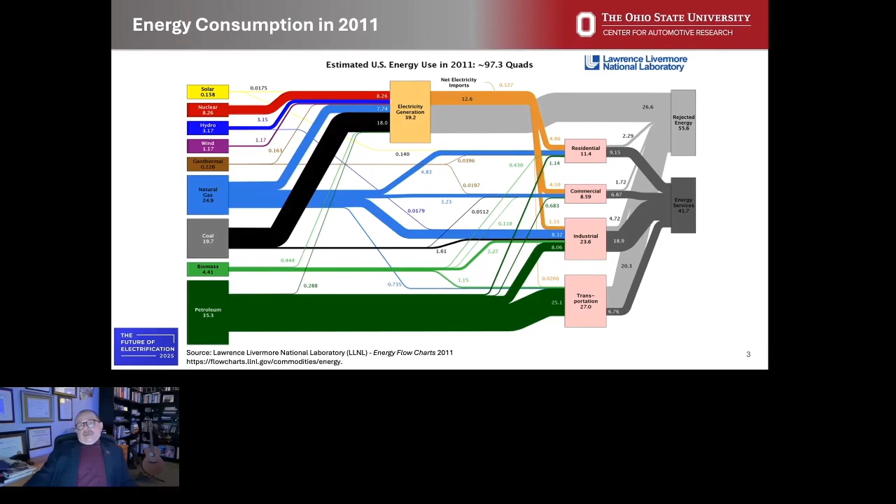Let's take a leap forward. The most recent data that has been published by Lawrence Livermore National Lab illustrates today's situation. So this is a 12-year time span between the two pictures.

What do we see? Well, electricity generation has changed dramatically, at least in the United States. You notice now that what used to be about 50% of electricity production based on coal-fired power plants is now less than 25% coal-based. Natural gas has replaced a substantial amount of that electricity production, and solar and wind power are doing a little, but not as much as perhaps we would like to. But the reduction in carbon emissions in electricity generation has been a clear trend, a clear theme in the development of energy systems over the past dozen years or so.

What is important to emphasize here is that transportation is still very much dependent on petroleum.

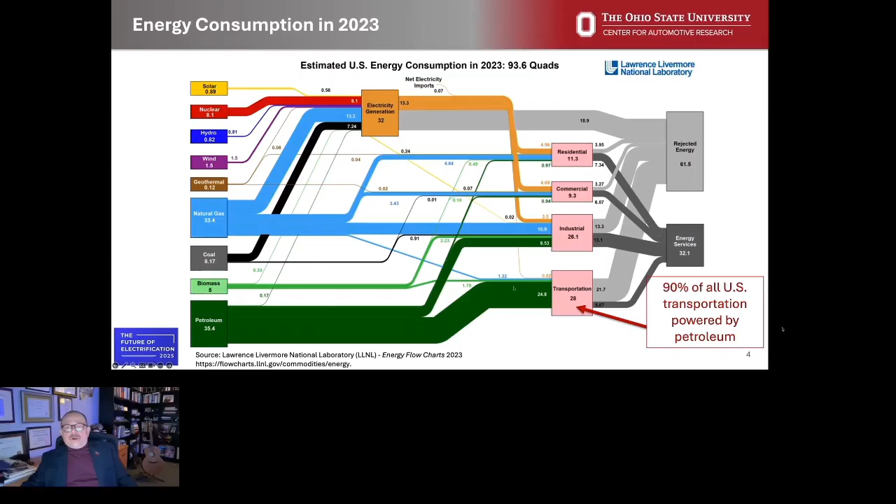Over the past 12 years or so, perhaps the biggest difference is the increase in the use of biofuels, fuels from biomass. What impact does that have on greenhouse gas emissions? Well, one consequence has been that while the electric power sector had historically been the largest producer of carbon dioxide and greenhouse gas emissions, over the past few years transportation has clearly become responsible for the largest fraction of greenhouse gas emissions.

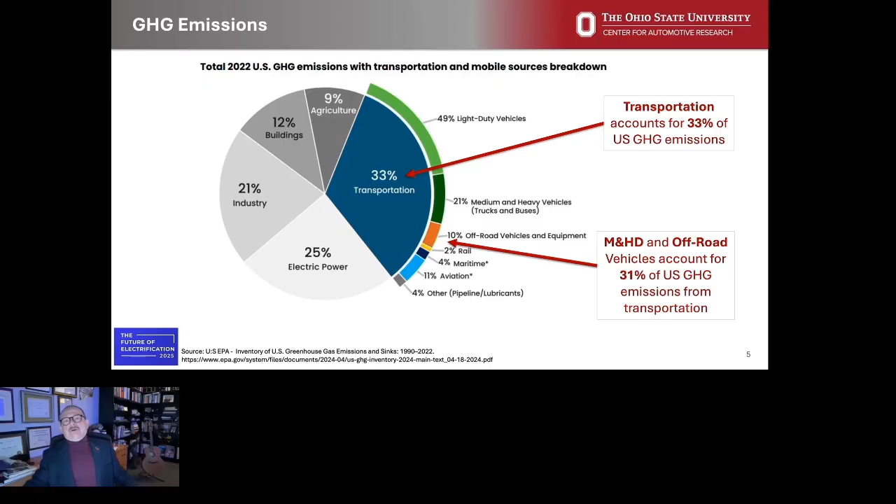Certainly true in the US, but I think this picture is not too dissimilar in the European Union. One of the important points here is that about a third of greenhouse gas emissions are associated with transportation, and once again about a third of that is associated with medium and heavy duty on-road vehicles and off-road vehicles. So altogether, a little more than 10% of greenhouse gas emissions are in that sector.

So we wish to reduce greenhouse gas emissions. What are the pathways that are available to us? Well, there are really, in my mind, three ways of thinking about this problem.

We can address the energy sources. For example, in electricity generation, transitioning from carbon-based fuels to non-carbon-based energy sources, such as wind, solar, geothermal, hydroelectric, et cetera, et cetera.

A second very important component of this is energy efficiency. Can we, by design, the use of different technologies, the use of advanced materials, develop more fuel-efficient vehicles to perform the duties that we wish these vehicles to perform?

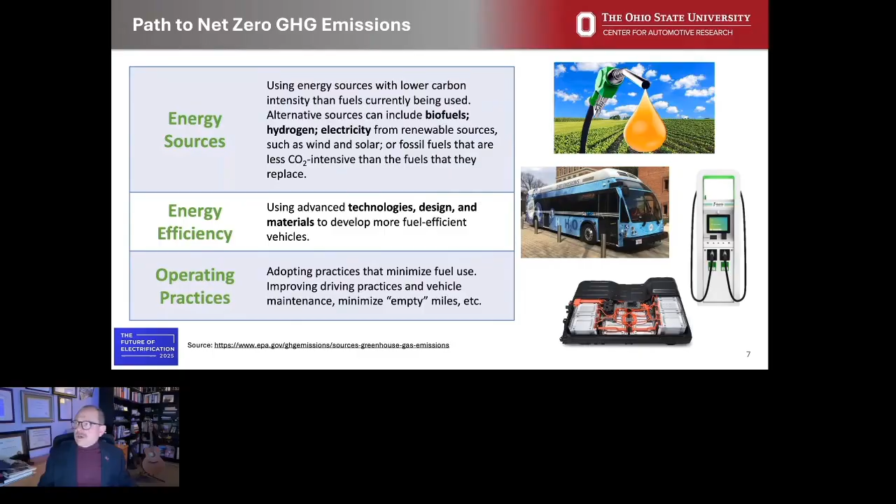And then finally, operating practices. It's not just the energy efficiency of the vehicles and the fuels we use to power them, but as an example, can we be more intelligent about how we ship freight? Could we minimize the so-called empty miles in freight transportation? This is just an example, but if we reduce the number of miles covered by trucks that are not carrying a load, that will be, from an operational perspective, a more efficient use of energy.

So let me say a few words, and I'll give you the big picture, dividing it between on-road and off-road commercial vehicles. I am largely going to use US data and figures as a starting point for my explanations, because that is what I have more immediate access to. But I think many of these conclusions could be easily translated to numbers relevant to the EU, for example.

If you take a look at on-road commercial vehicles in the United States, there are about 23 million commercial vehicles on the road. The way we represent them in the US is by classes. Class 1 and Class 2A are passenger vehicles and light trucks. From class 2B up, we are talking about commercial vehicles. Very important to understand that...

...while long haul tractors, the big tractor trailer vehicles that drive coast to coast every day, only represent about 9% of the total fleet, they represent almost 50% of greenhouse gas and, for example, NOx emissions, criteria emissions. It's important to understand that these vehicles are also predominantly fueled by diesel today.

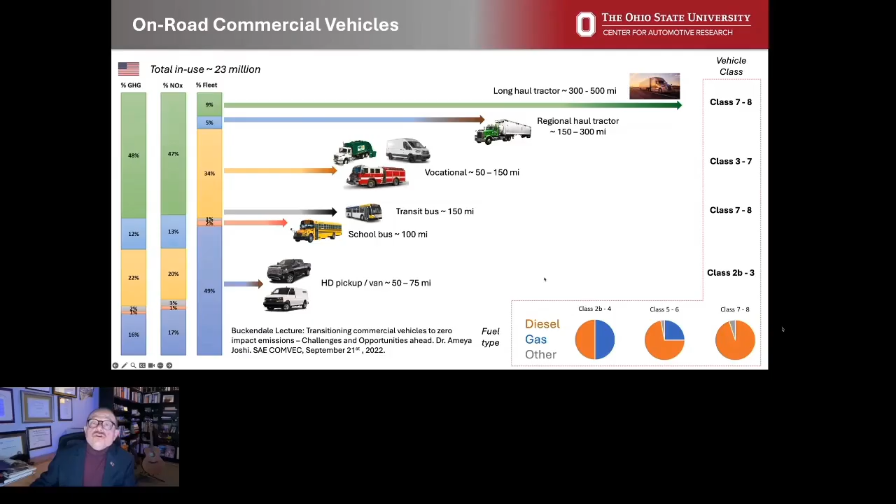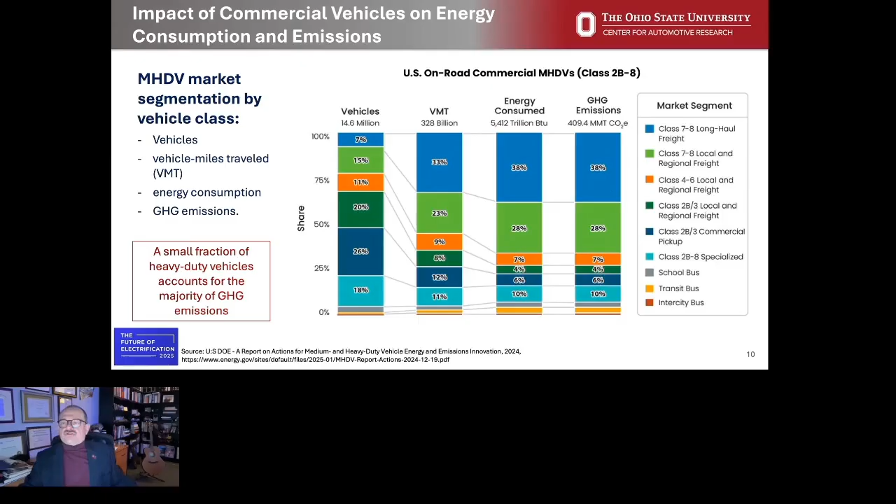If you look at the medium and heavy duty market segmentation by class here, you will see again a similar picture, a little bit more detailed. I won't read through all of these specifics, but I want to point out that when you look at it in terms of vehicle miles traveled and energy consumed, which of course correlates with greenhouse gas emissions, the class 7-8 long haul freight vehicles are really responsible for the majority. But there are a lot of other functions performed by vehicles with different missions, from regional freight movement to local functions to utility functions.

So I won't go into the details of this table, but I will make a few comments. I want to point out that over the years, there has been a clear timeline for emissions regulations for heavy-duty compression ignition, that is diesel engines, across major regions of the world. So you can see here the European Union, California, Japan, China, South Korea, India.

And it is very important to understand that there is a trend, a desire to reduce criteria emissions. So here we're talking about particulate matter, NOx emissions, and this has led to a push for advanced after-treatment systems and alternative powertrain technologies to enable a future for diesel engines. Some of these regulations are especially strict. In the US, the state of California has its own set of regulations in this domain.

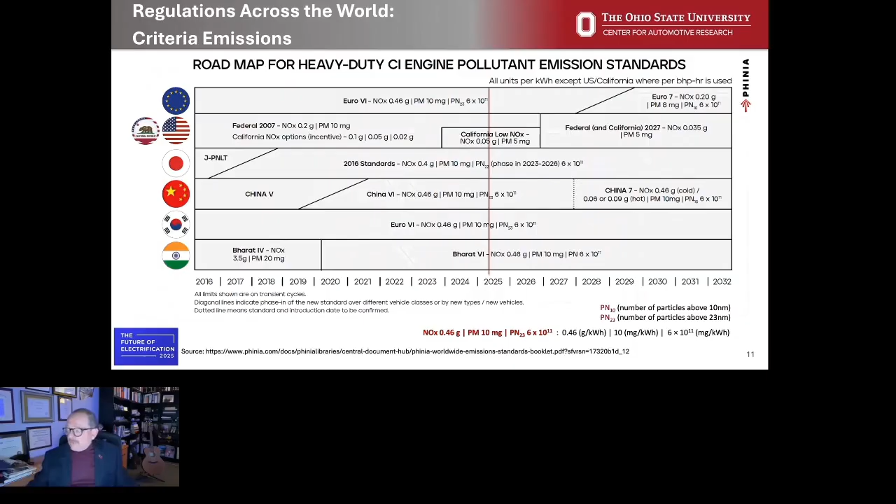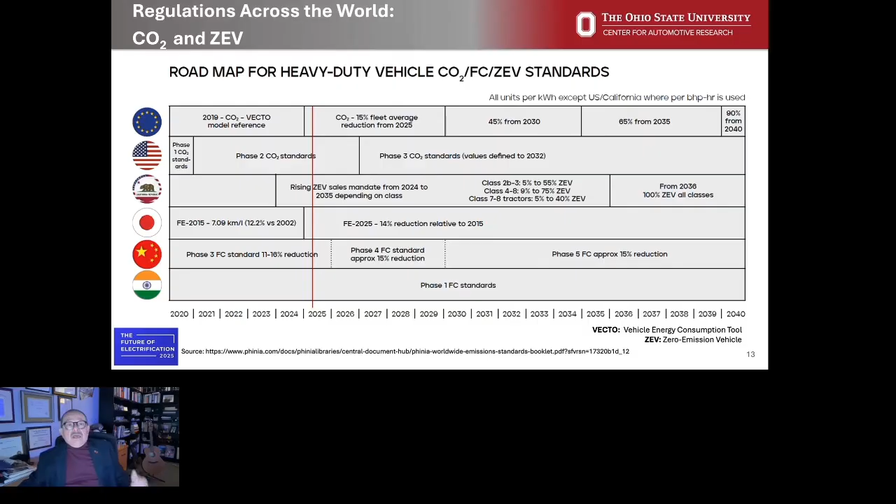That was with respect to criteria emissions. Carbon dioxide is a separate topic. This table shows a roadmap starting from a few years ago, 2020, with projections about different regions of the world. Notice that I've separated California from the rest of the United States. What are the projections for CO2 emissions in heavy-duty vehicles? The goal is to reduce CO2 emissions, providing strong motivation for alternative technologies, including electrification by batteries and hydrogen fuel cells.

The picture for off-road industrial vehicles is perhaps a little more colorful and diverse. The number of functions performed by these vehicles is virtually uncountable. On-road vehicles do one of two things: they either transport people or freight. Off-road industrial vehicles perform a number of critical functions in our economies. They are involved in construction, industrial applications, agriculture, lawn and garden care, recreational activities, logging, and mining.

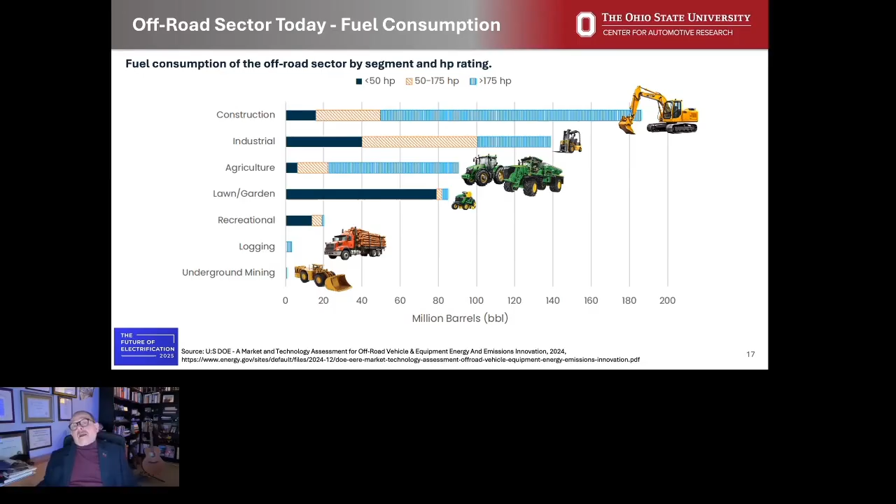Here is a picture that shows, from a fuel consumption perspective, how these different sectors are represented in two ways: by millions of barrels of petroleum used, and by engine size. The darker blue represents small engines, vehicles powered by less than 50 horsepower. For example, in the lawn and garden sector that's the overwhelming majority. Then there are medium range propulsion systems in the 50 to 175 horsepower range, and then the larger engines. Construction represents the largest fraction of fuel consumption in this off-highway sector, with industrial, agriculture, and surprisingly, lawn and garden functions not that far behind.

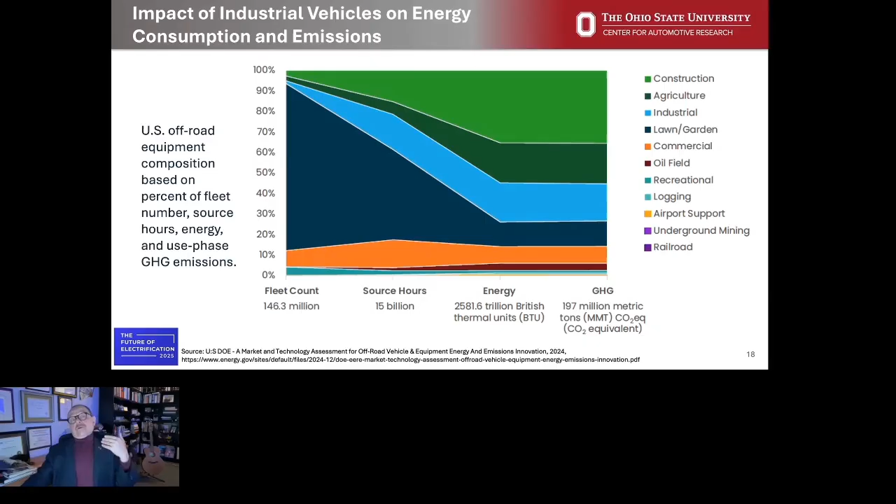Looking at a comparison of fleet count versus number of hours of usage of these vehicles, which correlates with energy and greenhouse gas emissions, you can see that construction, agriculture, industrial applications, and lawn and garden—again, a little surprising—together are probably close to 90% of total energy usage and greenhouse gas emissions. This is an important consideration, and one question we ask ourselves is how can we address this, and what alternatives do we have available for future greenhouse gas emissions reduction?

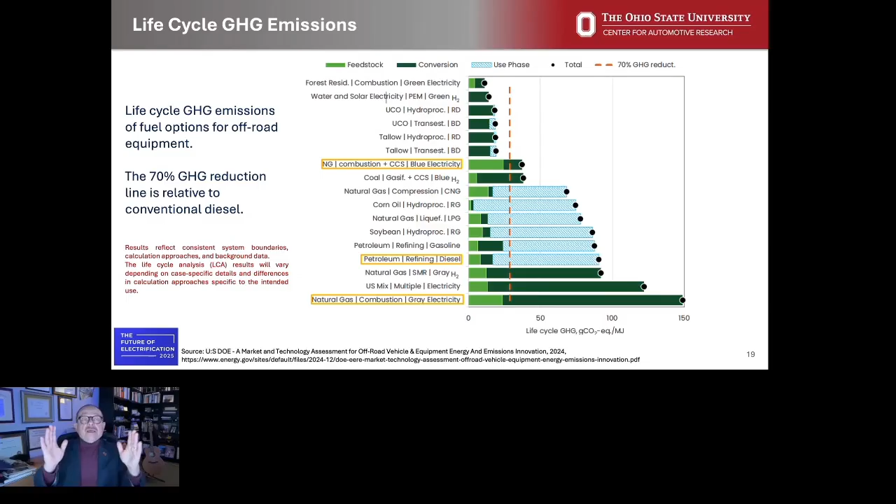It's important to understand that there are three phases in the greenhouse gas emissions of a vehicle: one is obtaining the feedstock itself, the second is converting that feedstock into a usable fuel through refining, and the third is the use phase. If I'm using a diesel-powered vehicle, my emissions are largely generated in the use phase. When using natural gas or other alternative fuels, emissions will be highly concentrated in the feedstock extraction and energy conversion process. It's very important to understand that there are upstream and downstream consequences.

I will make a brief comment about the fact that around the world, regulations for both criteria emissions of off-highway vehicles as well as CO2 or greenhouse gas emissions are evolving very rapidly.

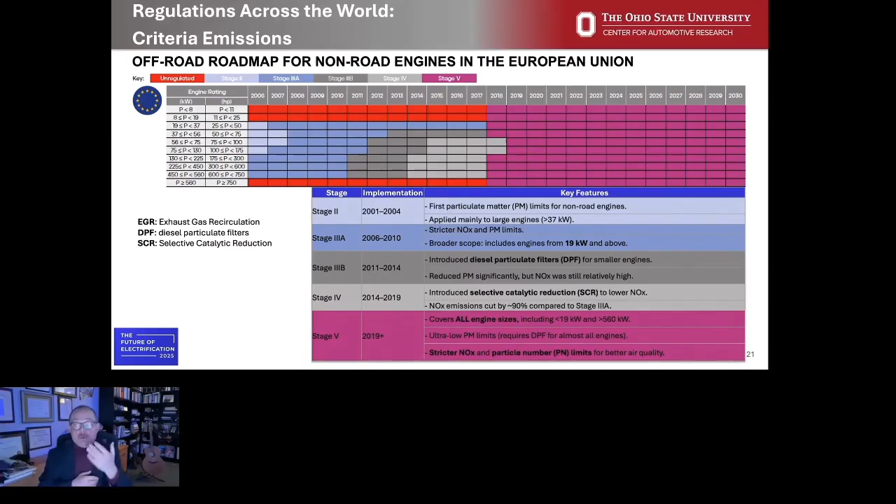I believe that you, the participants in this conference, will have access to the material I'm presenting. It's not the time to delve into details here, but I want to emphasize that as we go to what is referred to as the stage 5 criteria emissions regulations, we're looking at stricter NOx and particle number limits, with a focus on air quality for all vehicles used in the off-highway sector.

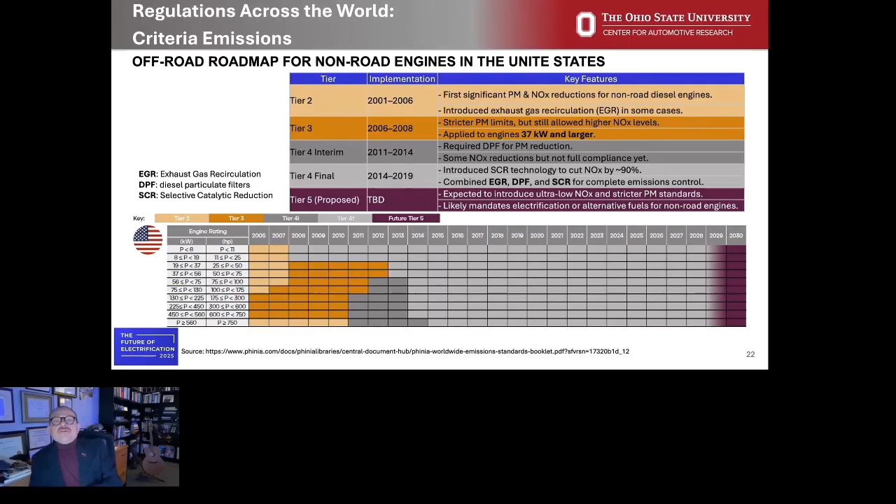And similarly, in the United States, we have what we call Tier 5. There are similarly very detailed and increasingly strict regulations for NOx and particulate matter emissions.

Summary of this first part of our conversation: it is a complex world. We have millions and millions of commercial vehicles operating every day in factories, farm fields, highways, and freeways, and they perform important functions for our economy. We depend on them. The ability to move freight and people is fundamental to economic development. There are significant challenges in finding technological solutions that help us perform these functions while also reducing greenhouse gas emissions and improving air quality.

So what I'm going to do next is talk a little bit about two of the technologies that are typically associated with electrification: batteries and hydrogen.

I will begin with talking about where the landscape of battery research and development, and also battery commercial development, is today. And I will begin by saying that there are really four elements that are important and must be considered.

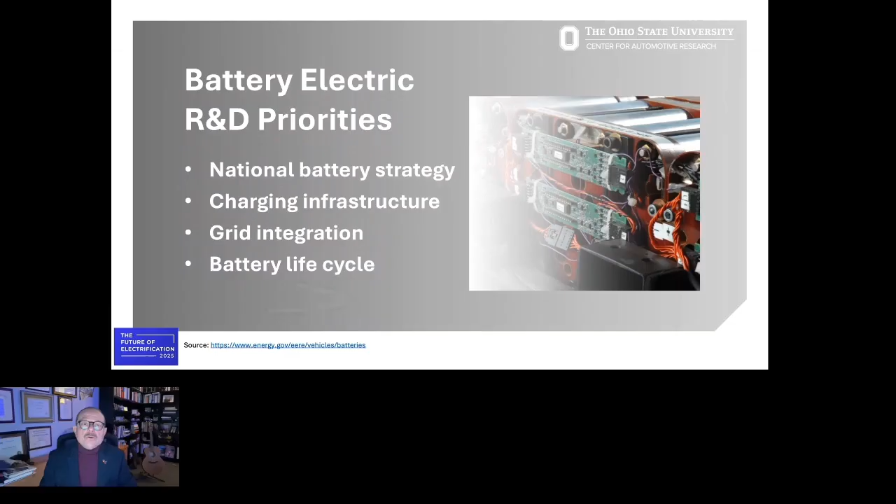One is there needs to be a strategy for how to deploy electrification of vehicles powered by batteries. That requires having a charging infrastructure capable of supplying the energy needed outside the fence and behind the fence. What do I mean by that?

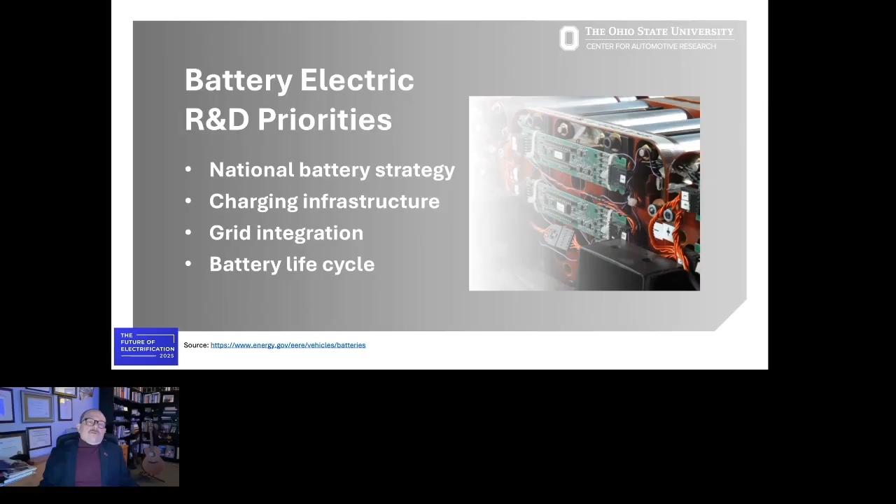Some of it could be public recharging infrastructure in the roadways. Some of it would be dedicated to the specific functions of a port or a factory plant, for example. This will require tight integration between the electric power grid and the charging infrastructure, and an understanding of how vehicles need to take advantage of electric power.

And we'll talk a little bit about the life cycle of batteries as well. A few years ago, in 2021, the U.S. Department of Energy produced a national blueprint for lithium batteries.

This is a document that is available in the public domain. If you do an internet search on those words, you will find it easily. But I want to point out that it's really important to understand there are stages to the development and deployment of battery electric vehicle technologies that are dependent on how lithium batteries are produced.

And that goes from the top level to the raw materials extraction. Which raw materials are used for the manufacture of batteries is extremely important. Lithium, of course, today is an important element. We're still strongly dependent on cobalt and nickel for many battery chemistries, and graphite, of course, is an important element. So where those raw materials are, the supply chain, the availability of materials - all of this is extremely important.

But that's one piece. There is an intermediate midstream step that is extremely important. There is a substantial amount of materials processing that needs to take place - we call it beneficiation. For example, lithium that may be extracted in the form of brine or ore from a lithium mine needs to be refined, much like we refine petroleum into gasoline or diesel fuel. And this processing is an energy intensive process that also has environmental consequences. It requires water. It's not a simple thing to do.

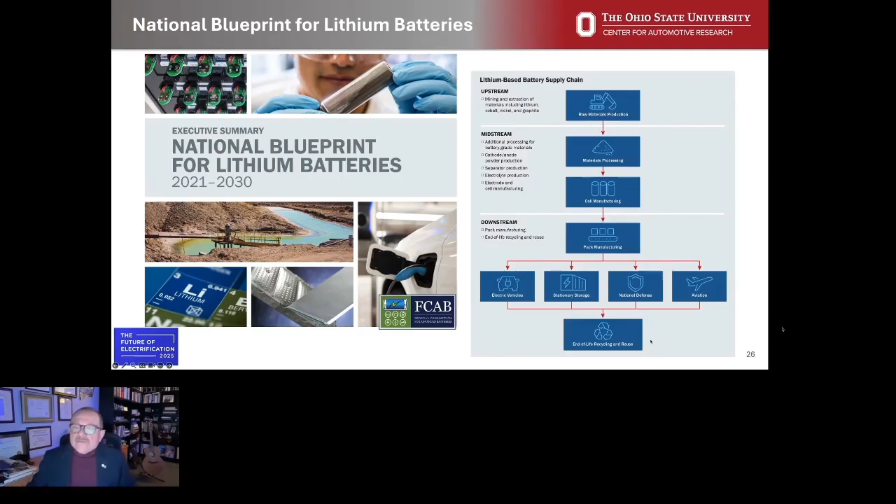Then we go into the downstream segment in which packs are manufactured and used for electric vehicles, stationary energy storage, aviation, defense applications, whatever they may be. And we must not forget the end-of-life recycling and reuse. So this basically represents the complete cycle.

There are challenges to this, as I have mentioned: securing access to both raw and refined materials, looking into alternatives for critical minerals. Today, the two most widely used chemistries in lithium-ion batteries are either based on iron phosphates and graphite, or on lithium, nickel, manganese, cobalt chemistries, also with graphite anodes. So there is a question, here is a US perspective,

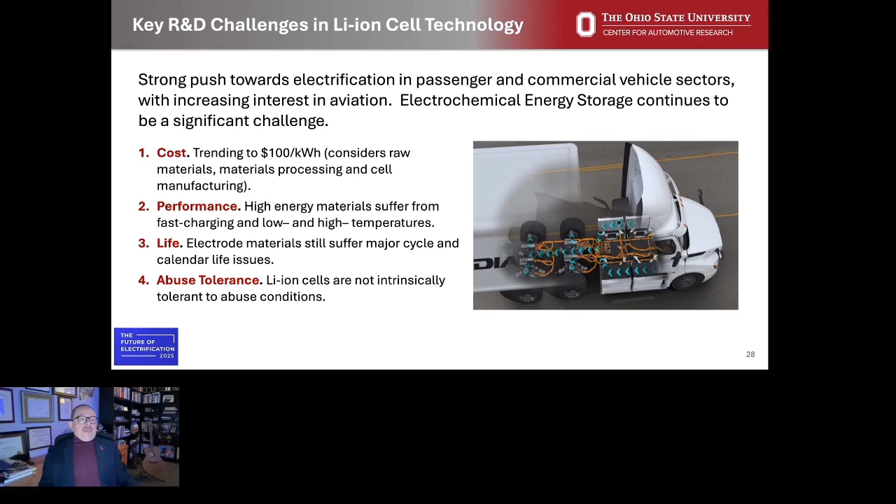There are performance issues. The performance of batteries in terms of their behavior at low and high temperature, or when subject to fast charging, is a very important topic of research. We're not finished exploring how to optimize the behavior of batteries under these conditions. Life—I always like to say batteries are electrochemical systems like the human body, and like the human body, batteries age. And there are abuse tolerance and safety considerations with respect to that.

I'll give a brief example of a project we're working on in collaboration with the US Department of Energy and Oak Ridge National Lab, in which we are exploring what it will take to enable battery electric trucks in drayage applications. Drayage trucks are the trucks that move freight from a ship.

So some of the questions we're addressing are, on one hand, the requirement for charging infrastructure, and on the other hand, how do you optimize the performance and longevity of the batteries used in these applications? You could imagine an application relevant in your industrial sector, define the duty cycles and mission profiles of your application, and study the feasibility of transitioning to battery electric propulsion.

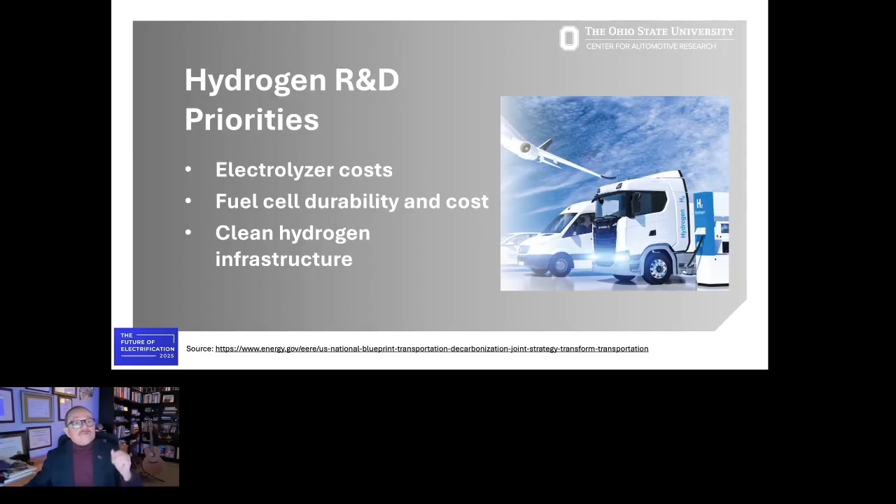The notion then is to use fuel cells, which are electrochemical energy converters that perform direct conversion of hydrogen into electricity. Infrastructure, of course, is an issue, just as is the case with upgrades and improvements to the electric power grid to enable charging. If we're seriously thinking about hydrogen as an energy vector for vehicles of the future, we would need to have the appropriate infrastructure.

A couple of words about hydrogen fuel cells. They are capable of achieving higher efficiencies than internal combustion engines. They are zero emissions at the point of use, and generally speaking, relatively simpler. The stack itself does not really have any moving parts.

But there are challenges. Cost across the board, from the materials to the production of these systems. Their durability is very important. Just as we have to deal with battery aging, we need to deal with the durability of membranes and catalysts. And most important, the biggest challenge is infrastructure to enable hydrogen refueling.

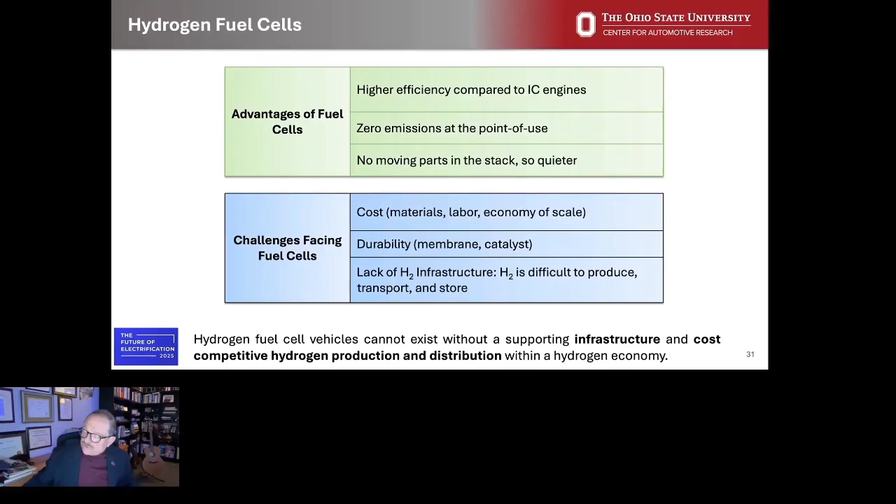I'll make a couple of engineering comments about some of the challenges that are sometimes overlooked with regard to fuel cells. They produce a lot of heat. While it is true that a fuel cell can be 50% efficient, the other 50% is heat generation. And unlike in an internal combustion engine, where amply a third of the heat produced by the engine exits through an exhaust tailpipe system, in a fuel cell we have to deal with cooling systems that have to handle a substantial amount of power.

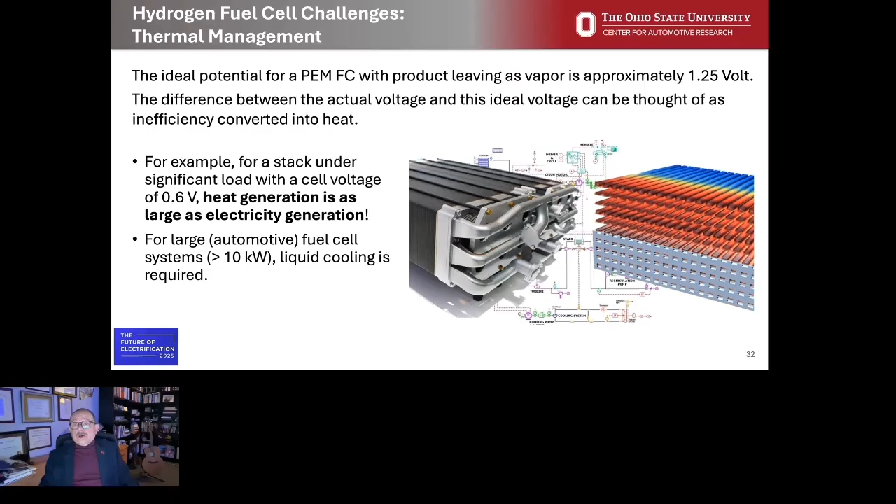Imagine that a 100 kilowatt fuel cell system: if you're producing 100 kilowatts of electric power, you'll produce 100 kilowatts of heat at 50% efficiency. So imagine some of the challenges with the cooling systems.

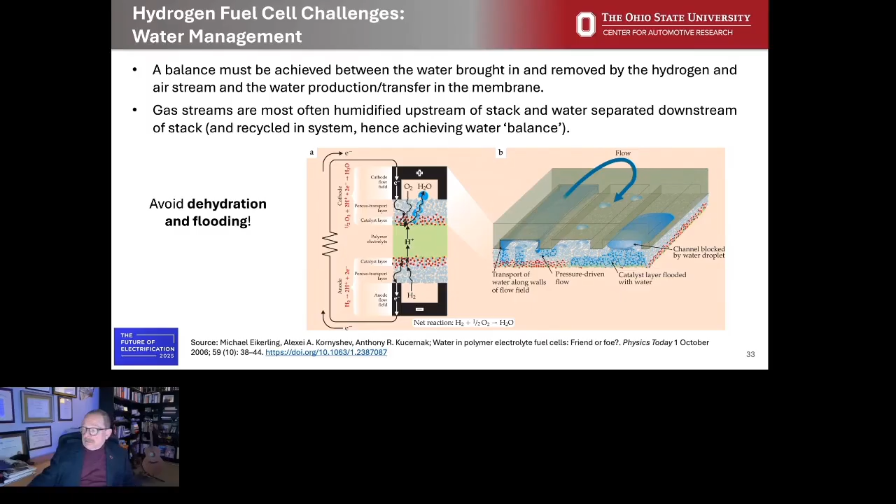It's very important to understand that humidification of the membrane in polymer electrolyte membrane fuel cells is another important challenge that needs to be addressed. The gases used in the energy conversion must be humidified upstream of the stack. We need to achieve a water balance in the system, and ambient temperature, of course, has an impact on that.

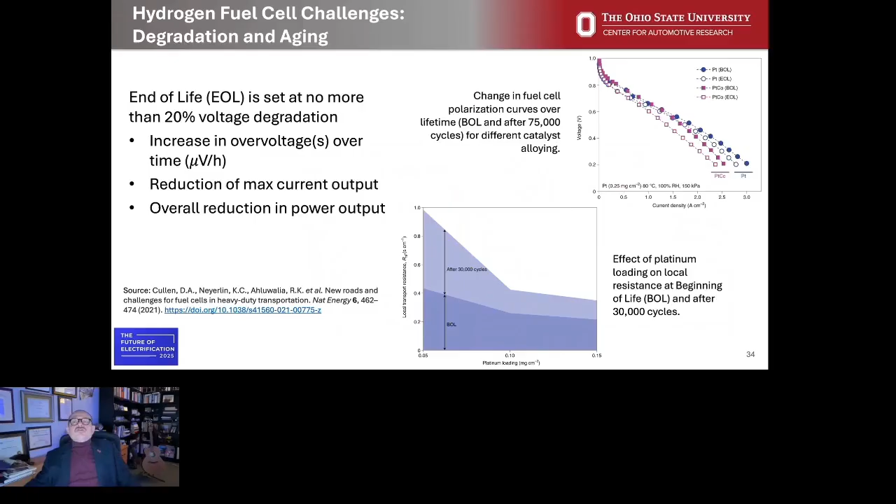And finally, degradation and aging is a substantial challenge in the world of fuel cells. Fuel cells employ catalysts to improve conversion efficiency, but these catalysts can degrade and become less functional over time. So there are issues here with regard to the aging of fuel cells that are analogous in some ways to those related to the aging of batteries.

When I speak to my colleagues in the commercial vehicle sector, there is a general understanding that if we can get hydrogen to cost $1 to $2 a kilogram, and have an infrastructure capable of delivering it, it would become an attractive alternative to diesel fuel, for example.

So how do we produce hydrogen? This is a very important point that ties in to some of the things I said earlier. One way of producing hydrogen is by electrolysis of water. Well, that of course requires electricity.

The US Department of Energy has a target, but a target is a wish. It is not necessarily an executable plan to arrive at $1 per kilogram hydrogen from water electrolysis, which would require a significant reduction in the cost of electricity, in the capital cost, and in operations and maintenance. So the point is that hydrogen production by electrolysis is something that is desirable, but will require significant cost reduction before it becomes attractive.

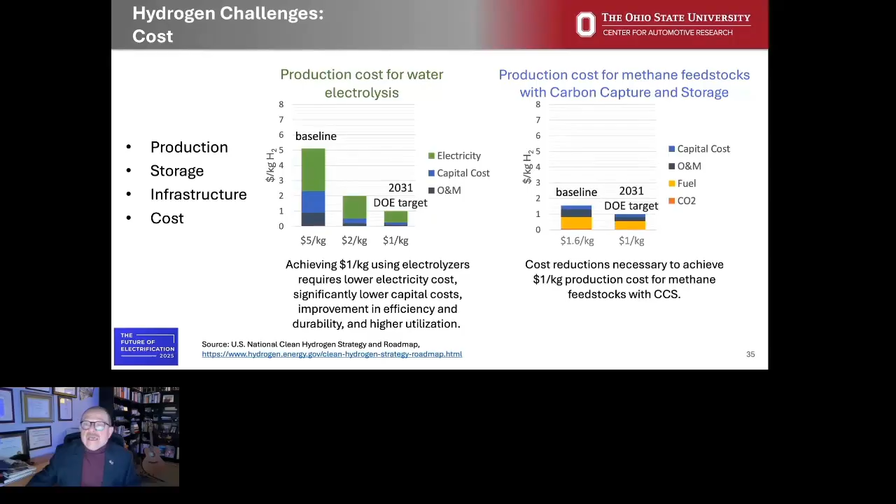But understand that this would make sense in a context in which the steam reforming of methane or natural gas is accompanied by carbon capture and storage. Otherwise, the upstream emissions would be too large.

Electrification can take place in multiple forms. Here are some examples of vehicles actually on the road in the United States: a class 3 battery electric small truck, a class 6 larger battery electric vehicle used as a refuse hauling truck, the UPS trucks we see everywhere here in the US, which are actually EVs, and a utility truck.

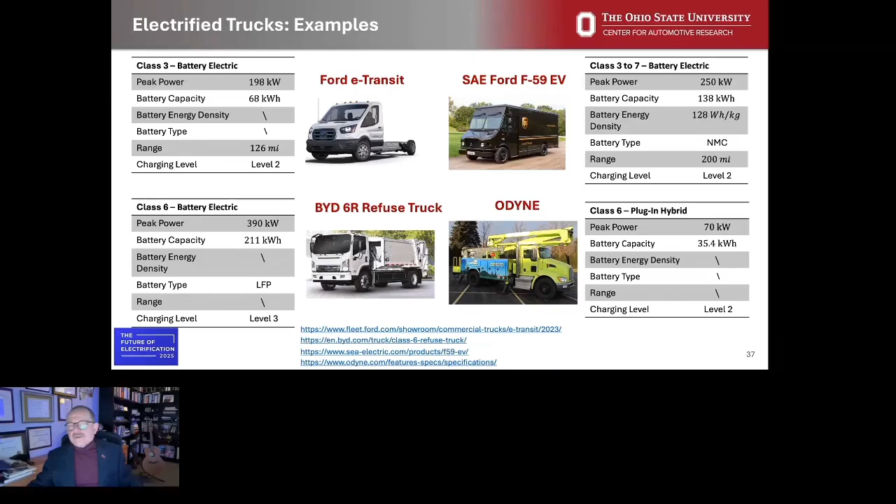I'll give a brief example using this utility truck to make a couple of important points. Odyne is a company making plug-in hybrid electric medium-duty utility trucks, though this data is a few years old and I'm not sure how many they have now. The key point is the issue of mission profile, which in every commercial application, on or off highway, is critical to understanding what architecture is most appropriate for that specific use case.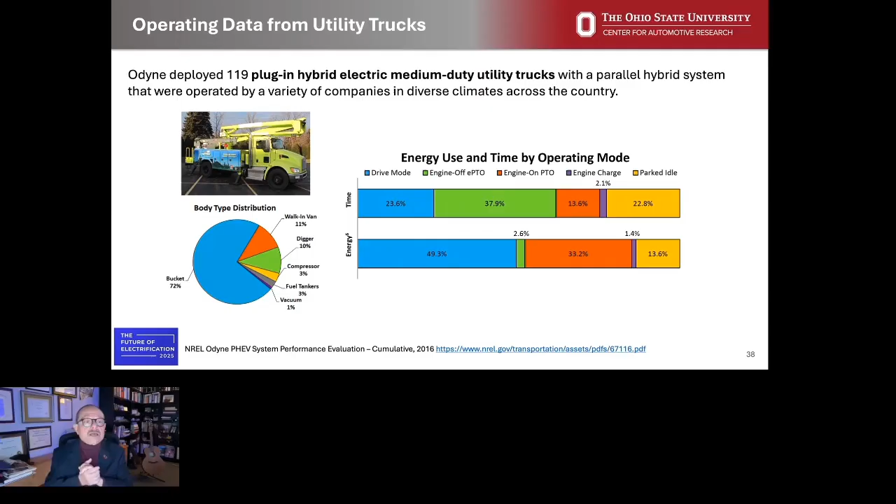What about energy consumption? About 50% of the energy consumption is associated with drive mode and about a third with engine-on PTO. This is just an example of a utility truck, but whatever application may be relevant to you, understanding the duty cycle is of critical importance.

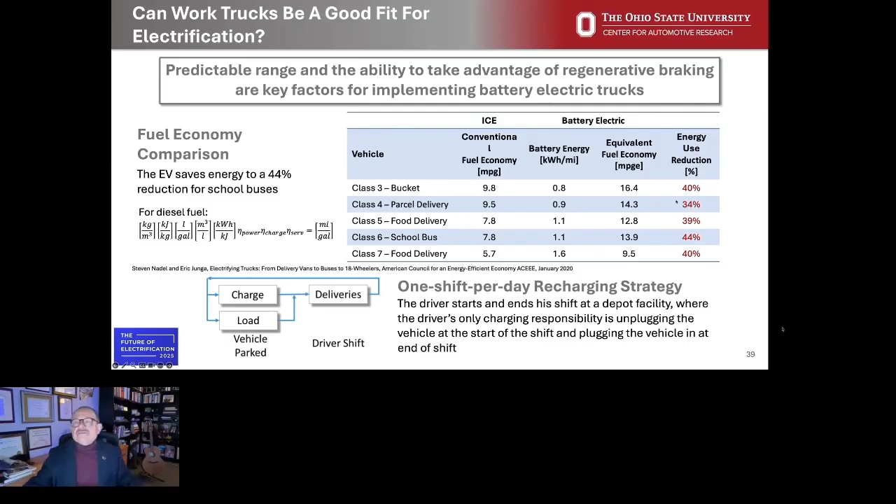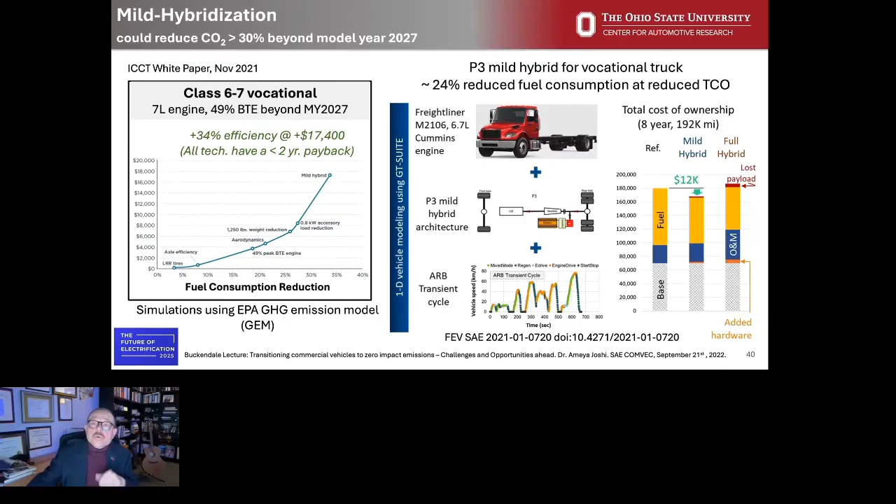In a study done relatively recently for other applications—bucket trucks like the one I showed you, parcel delivery, food delivery, school buses—there's a question of what the potential for energy use reduction is, which can be significant for these specialized applications. But there's also the question of what benefits can be achieved, and in a variety of ways. For this vocational truck, a mild hybrid powertrain may be enough to achieve significant fuel consumption savings, over 20% for this application, without investing too much in the battery pack.

This brings up the subject of total cost of ownership. For a personal vehicle, customer preferences like looks, color, and convenience features are sometimes the most important things. But for vehicles used in the commercial sector, on or off highway, total cost of ownership is and should be an essential criterion in making decisions about the architecture of the propulsion system and the selection of energy sources and fuels.

It's important to understand that total cost of ownership includes the cost of the vehicle, the cost of financing when a fleet is purchased, the cost of fuel as just one element, insurance, maintenance and repair, taxation structure in the specific country where the vehicle is used, changes in payload—will a battery electric vehicle reduce payload because of increased mass from the battery—and in general, labor and time, such as time spent charging the vehicle. It's very important to understand total cost of ownership.

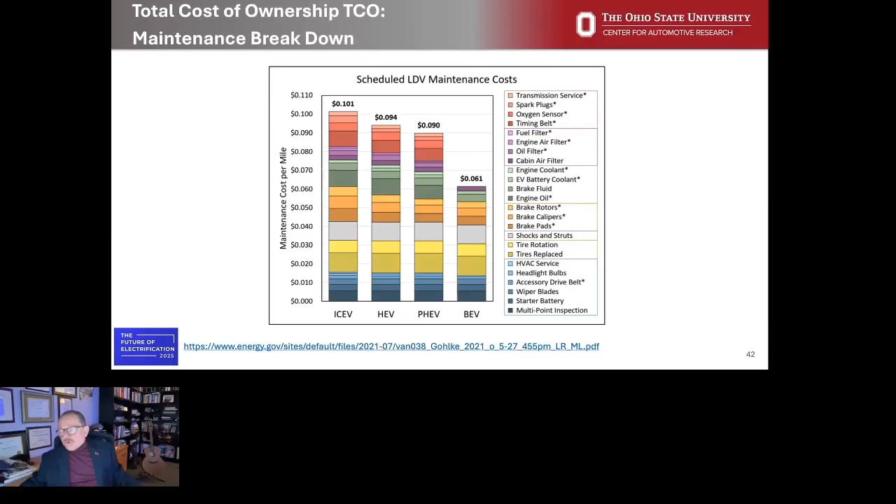Here's a simple example: looking at maintenance breakdown, there's a clear advantage to battery electric vehicles with much lower maintenance costs. But there are other elements to consider besides maintenance. There are also risk factors and uncertainties with alternative powertrains—for example, if the vehicle uses a battery, what if it has to be replaced? That's potentially very expensive. What's the initial price differential? Will there be incentives or tax rebates? What about the price of fuel? Here in the United States, diesel price fluctuations are substantial.

And from one month to the next, your benefit in having an electric solution may be nullified by a decrease in diesel fuel prices. Similarly, electricity prices, annual mileage - do we know exactly what kind of duty cycles the vehicle performance, how much it will be used, and so on.

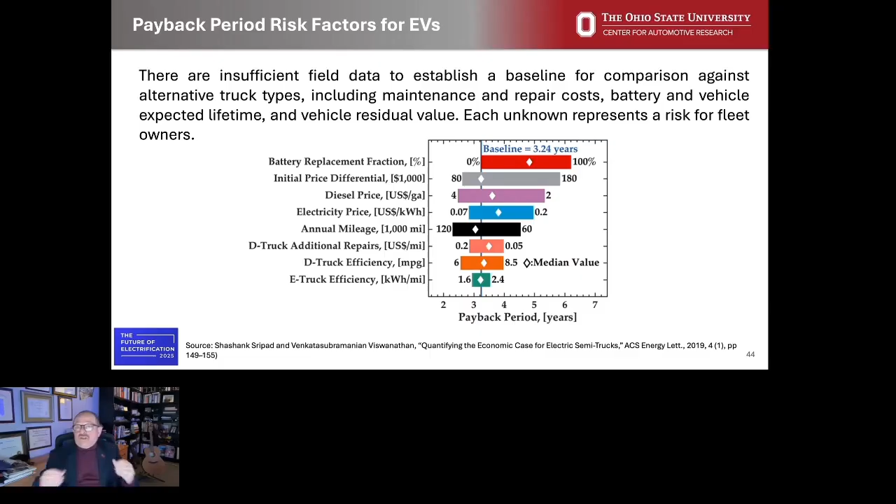These are all observations that have an impact on payback period. So if I need to make a larger investment in purchasing an advanced or alternative powertrain vehicle, what's my payback, and what is the uncertainty in reaching this payback point? So these are all important considerations.

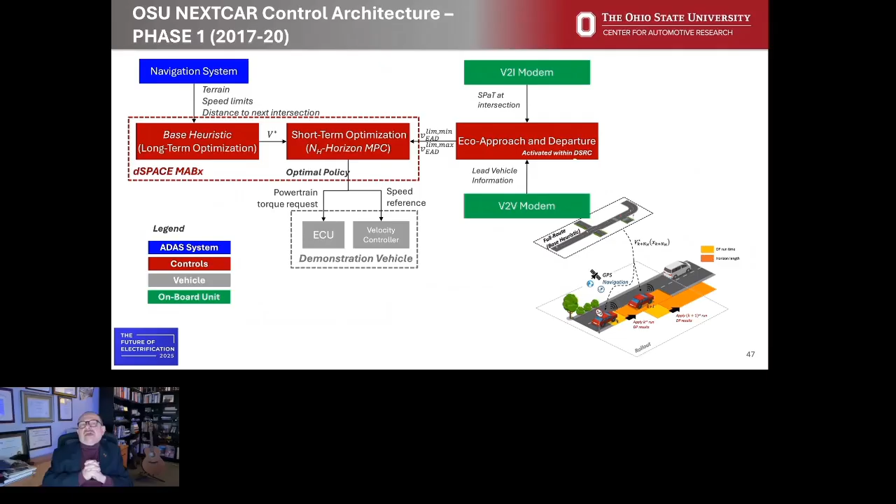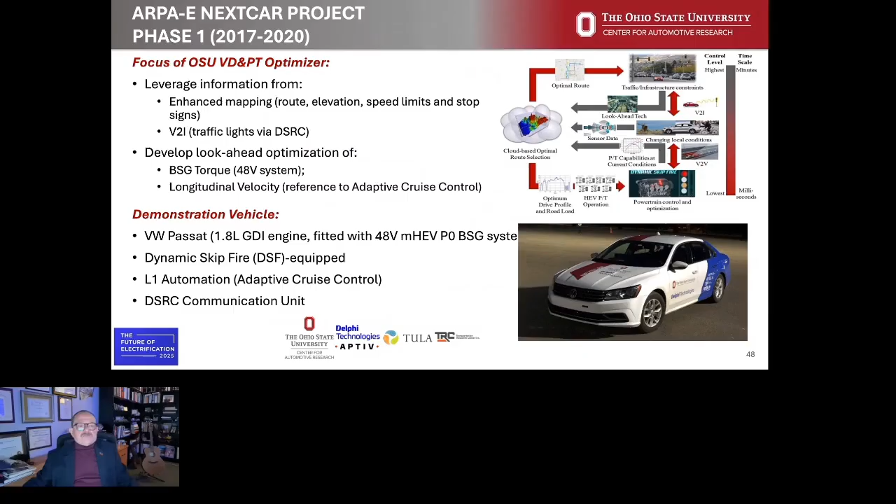And I will close with a very brief comment about the fact that there are some fascinating opportunities available to us. I have had the pleasure of working for a number of years now on a program called NEXTCAR. It's focused on passenger vehicles, but the focus is how is it possible to utilize knowledge of the duty cycle of the vehicle and of its surrounding environment to achieve energy efficiency improvements. And this, I think, is something that we clearly demonstrated has potential benefits in passenger vehicles, utilizing sensing and infrastructure provided information and the methods of artificial intelligence, machine learning, and advanced control ideas.

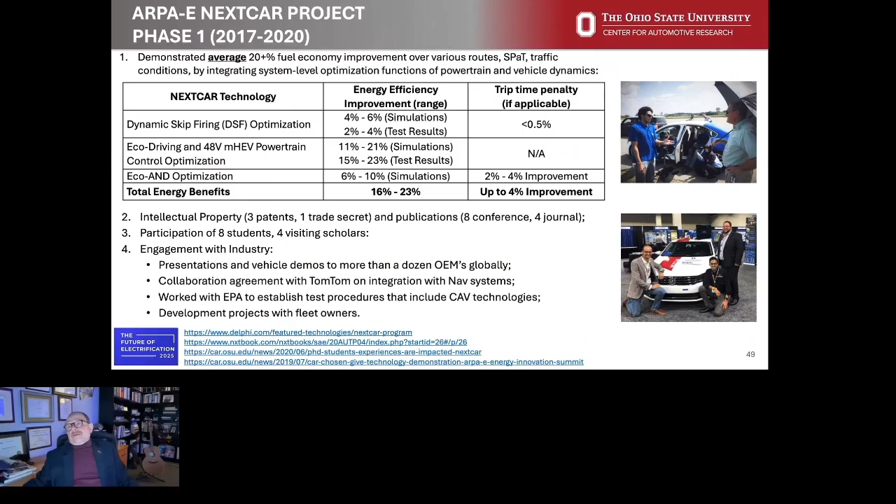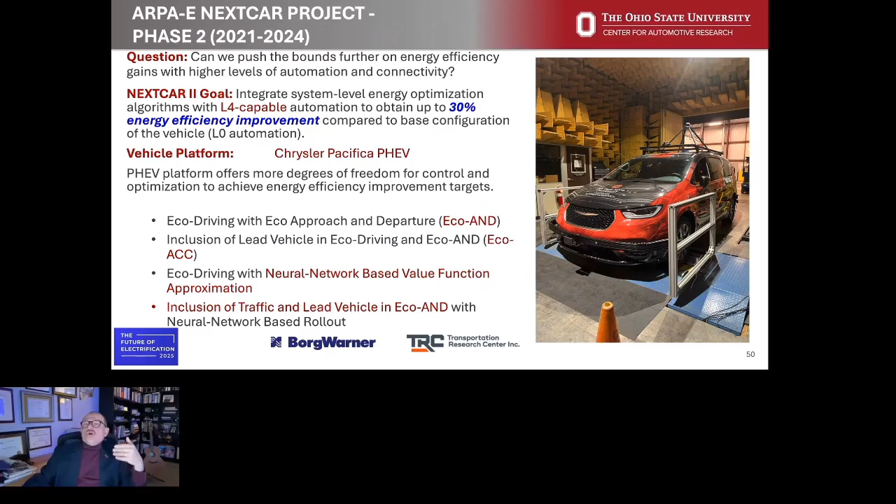We demonstrated that it is possible to achieve operational improvements of the order of 20% in passenger vehicles. And some of these things may well be achievable in commercial vehicles as well. We're currently working on the next phase of this project, which involves actually a vehicle that is automated. So in addition to connectivity with the infrastructure, driving automation may also provide additional benefits.

So I will stop here with a brief conclusion by simply saying that it's a very exciting time, certainly from the perspective of someone who spends his days engaging in research programs with the automotive industry and the commercial vehicle industry. There are many opportunities, many challenges, a lot of work ahead of us. And I will be delighted to now engage in a conversation with you and answer any questions you might have. Thank you very kindly for attending this presentation.

Dr. Rizzoni, thank you for that presentation. It was very good. Thanks for sharing your work and your perspectives.

Question on alternatives to petroleum-based fuels. What do you see going forward? Anything emerging? Yeah, the petroleum conversation is quite interesting, and I'll use as an example the aviation sector.

We might argue that a certain industrial application may transition from a diesel engine powered vehicle to a battery electric powered vehicle. Pretty straightforward, but I don't think that any of us imagines that airplanes will ever cross the Atlantic Ocean or the Pacific Ocean on lithium batteries. I think we will all agree that that's unlikely, right? So the aviation industry is very much looking at sustainable fuels. So the problem with engines is not the engine itself. Internal combustion engines are great machines. It's the fuel we use to power them.